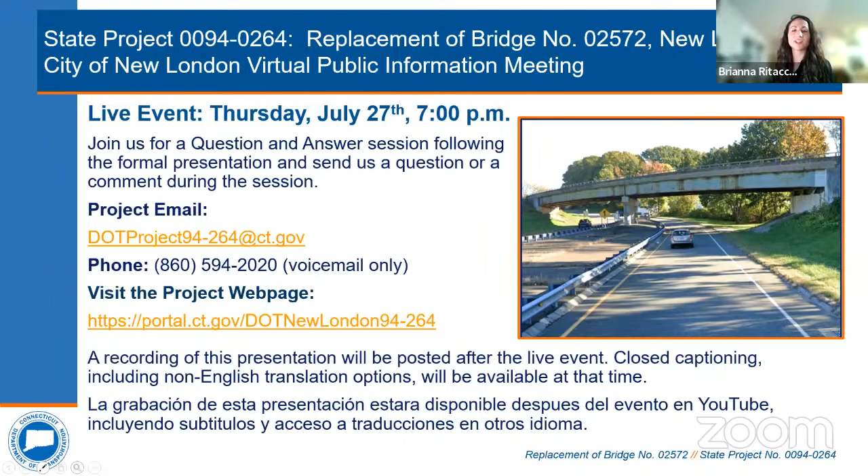Good evening, everyone, and welcome to the virtual public information meeting for state project number 94-264, which is the replacement of Bridge 2572 carrying Route 1 over South Frontage Road and the I-95 off-ramp in New London, Connecticut. My name is Brianna Ritacco, I'm the project engineer with the Connecticut Department of Transportation for this project. We hope everyone finds the presentation informative and that we'll be able to address any questions or concerns you may have. I also wanted to thank Brian Sear, the City of New London Public Works Director, for meeting with us back in May to discuss the project and for helping to make tonight's meeting happen.

So first, I'll hand it to Louis to explain how to turn on captions and subtitles.

Available to those joining us tonight through Zoom is the option to view captions or subtitles. To turn on this feature, select the Show Captions button or the CC button at the bottom of your screen. Then select the Speaking Language button and then select the desired language.

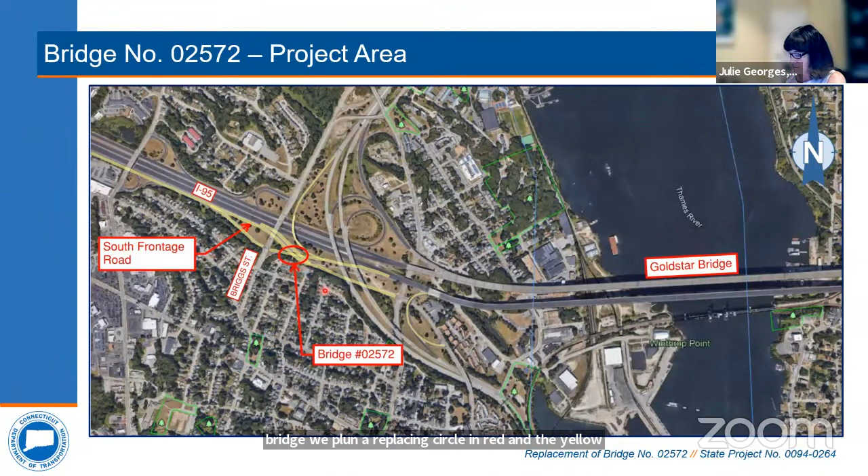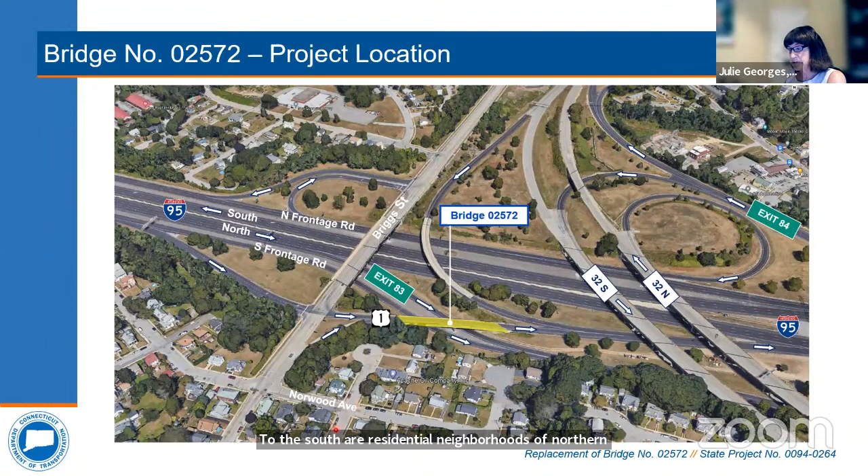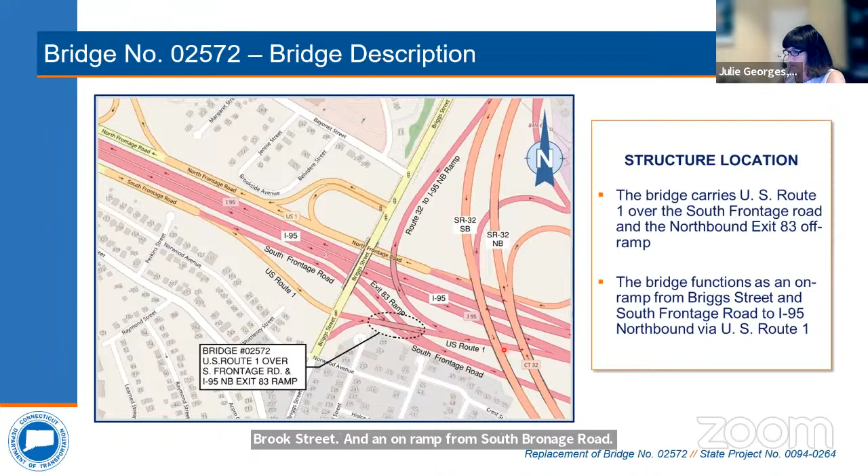The beams also carry loads like wind and, on occasion, earthquake loads, which is rare. The superstructure is carried by the substructure to the ground. The substructure components are wing walls, abutments, and piers.

All state bridges and local bridges over 20 feet in length are inspected every 2 years by the Connecticut Department of Transportation's Bridge Safety and Evaluation Unit. The major bridge elements are assigned a condition rating on a scale of 1 to 9, with 9 being excellent and 1 being imminent failure. Typically, when a major bridge component such as the deck, the superstructure, or the substructure reaches a condition rating of 4, a project is initiated to address the deficiencies.

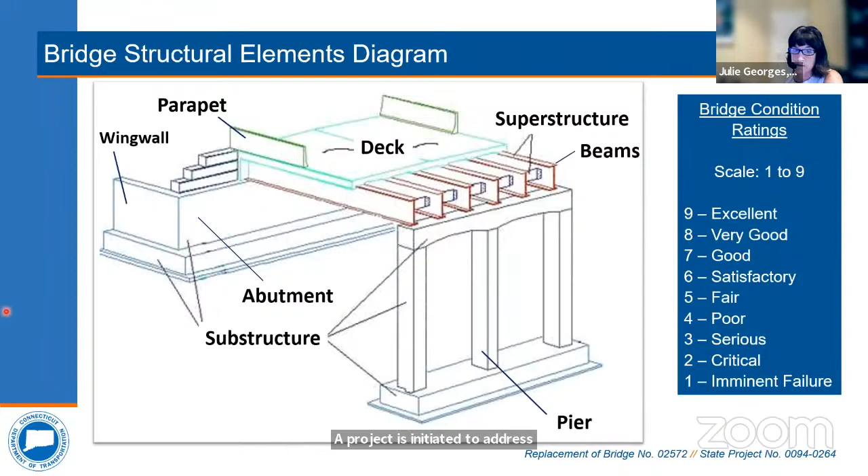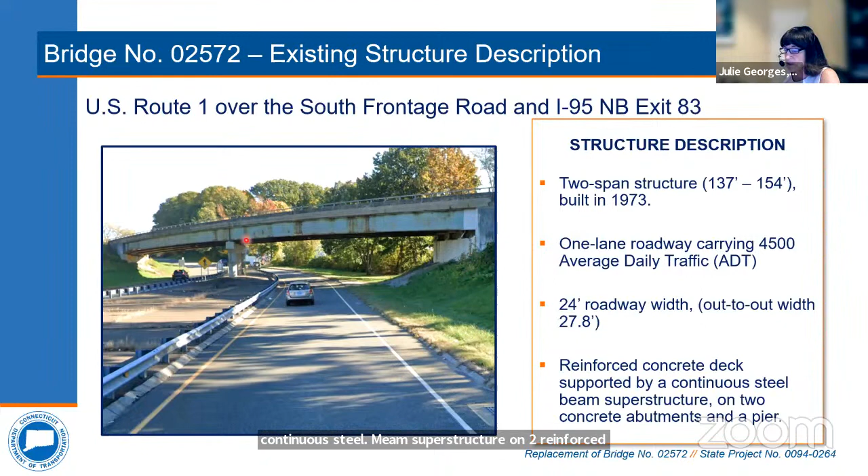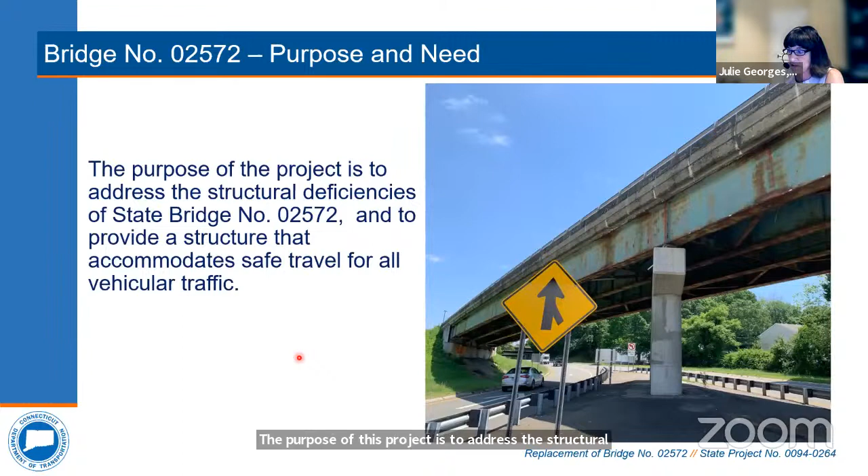The bridge is a reinforced concrete deck supported by a continuous steel beam superstructure on 2 reinforced concrete abutments and a reinforced concrete pier. The purpose of this project is to address the structural deficiencies of State Bridge 2572 and to provide a structure that accommodates safe travel for all vehicular traffic.

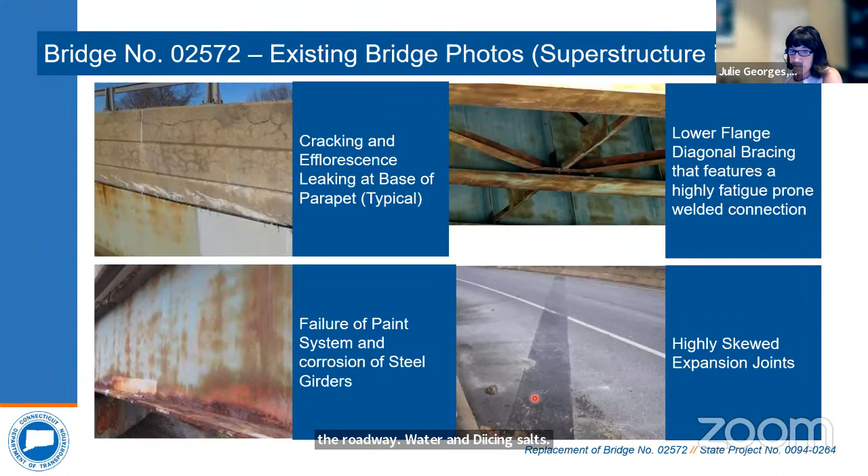The bottom right, we can see the highly skewed expansion joints. This expansion joint pictured here is called an asphaltic plug joint. Joints are meant to protect the beams beneath them from the roadway, water, and de-icing salts. The high skew makes it hard to keep many joint systems effective in terms of preventing leaks.

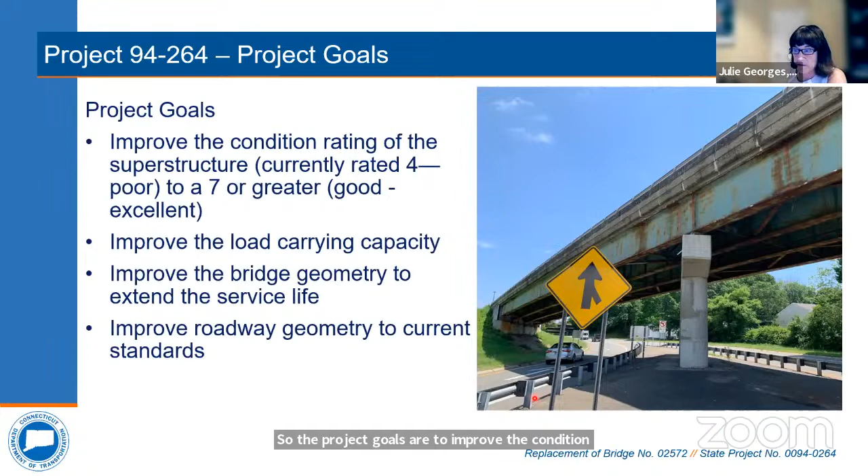So the project goals are to improve the condition rating of the superstructure to a 7 or greater, to improve the load carrying capacity, to improve the bridge geometry to extend the service life, and to improve roadway geometry to current standards.

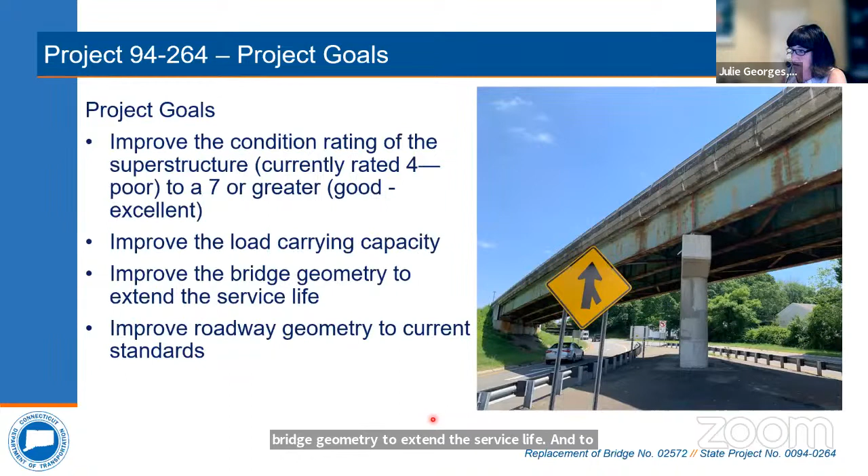This is the proposed roadway plan. This legend helps to explain this drawing. Yellow indicates proposed pavement, orange indicates proposed structure, the green fill, and the brown proposed cut.

The roadway reconstruction depicted is required because of the bridge replacement, which I will go into describe in more detail in a few moments. US Route 1 and the northbound entrance ramp will be shifted to the north and reconstructed for about 1,075 feet. The profile of this road will also be increased to provide proper vertical clearance for the bridge.

South Frontage Road will also be shifted to the north and reconstructed for approximately 1,300 feet. Briggs Street will be widened slightly and repaved for 390 feet. The slip ramp that now allows you to go from Briggs Street directly onto the entrance ramp will be eliminated and removed.

Other roadways requiring some repaving will be the exit ramp as it merges into South Frontage Road and the I-95 on-ramp from Route 32 onto Route 1.

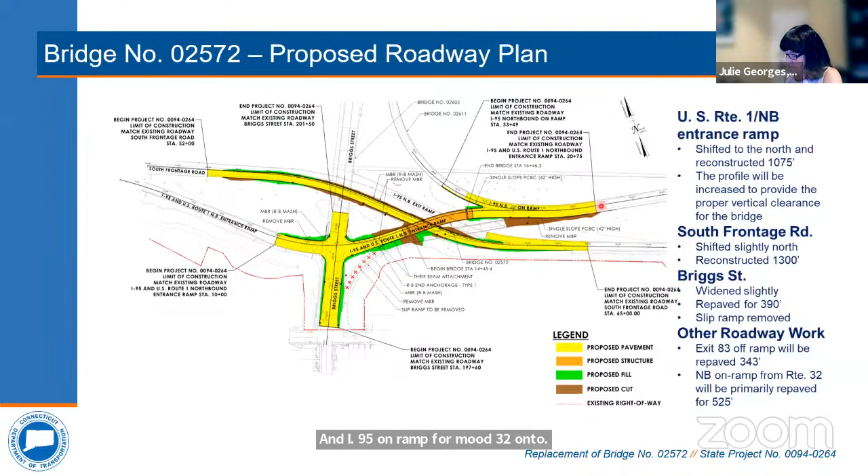These drawings are typical sections, and they show cross sections of the proposed roadway and use arrows to depict the lane use and show the width of the roadways. This is the view you would have if you're driving on the road. The legend shows the dark gray represents proposed pavement reconstruction, the brown indicates proposed guide railing, and the green indicates topsoil and seed.

The top typical section here is Route 1 northbound entrance ramp. It's a one-lane, one-direction road with a 12-foot travel lane, an 8-foot left shoulder, and a 12-foot right shoulder. South Frontage Road is also a one-lane, one-direction road with a 12-foot travel lane, a 4-foot left shoulder, and a 10-foot right shoulder.

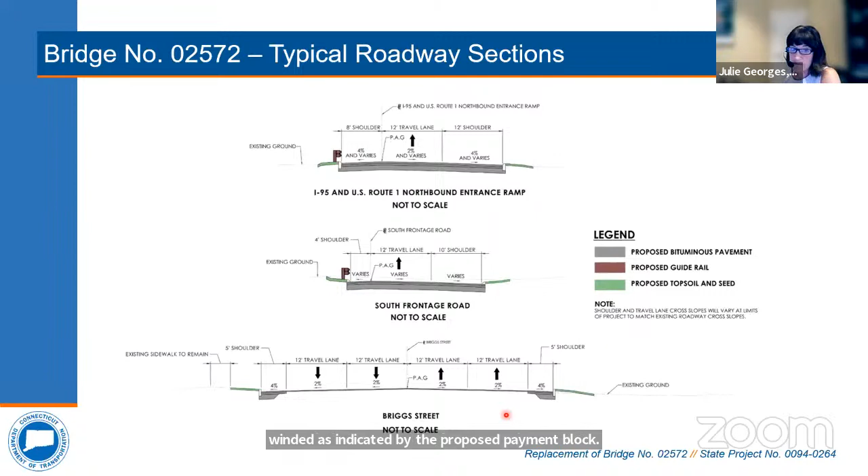Briggs Street is a 4-lane road that carries 2 lanes in each direction, and you can see that it'll be widened. The shoulder will be widened as indicated by the proposed pavement block. The widening will allow bicycle traffic to use the road more safely.

This is the plan for the new bridge. In terms of the general plan, the legend indicates that the light gray is the existing structure, the orange is the proposed structure, and the yellow is the proposed pavement.

The new bridge will be constructed to the north. This will simplify construction in that it will allow existing traffic to use the existing bridge while it is constructed. The new bridge is a single span, while the existing bridge is a 2-span bridge.

The elimination of the pier will reduce maintenance costs in the future. It's also a shorter span, the new bridge, which will also reduce maintenance costs in the future. The new bridge has abutments which are perpendicular to the direction of traffic and eliminates these heavily skewed joints and allows the bridge to be more serviceable and maintenance friendly.

The thin orange lines depict the wing walls and retaining walls required for the bridge. Retaining walls and wing walls will be required in all 4 corners.

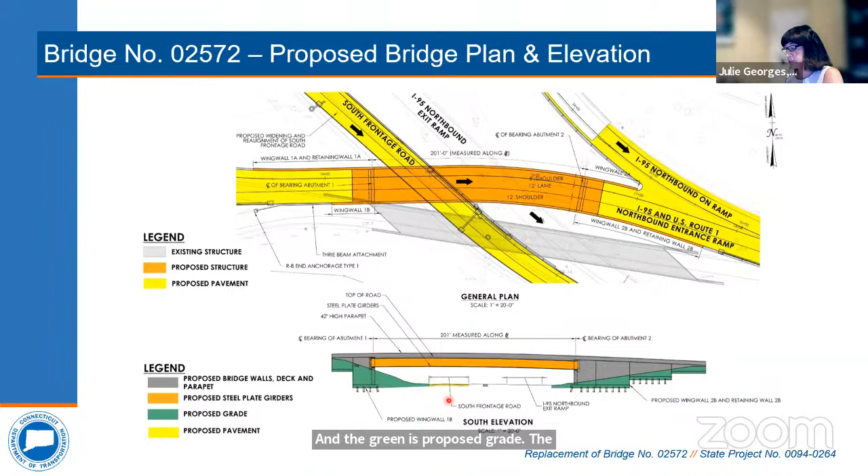This is a southern elevation of the bridge from the south looking at the bridge. The dark gray is proposed bridge walls, deck, and parapet. The orange is proposed steel plate girders, and the green is proposed grade. The yellow is proposed pavement, which is indicated here for South Frontage Road.

This slide helps to explain how this bridge will be built. The top left shows the bridge as it exists today from the view as if one is driving on the bridge. The top right shows stage 1 construction, which will provide a new precast concrete barrier curb, and the road will be shifted slightly to the right. A 12-foot lane will be provided, and a portion of the existing bridge will be demolished.

During stage 2, the new bridge can be built in its entirety while the existing bridge maintains the existing traffic. In the final cross section, the new bridge will carry all the traffic, but the remainder of the existing bridge will need to be demolished.

You can see from this drawing that the new bridge is wider than the existing bridge to meet current standards. The new bridge is also deeper than the existing bridge to allow for a longer span, a shorter span without a pier.

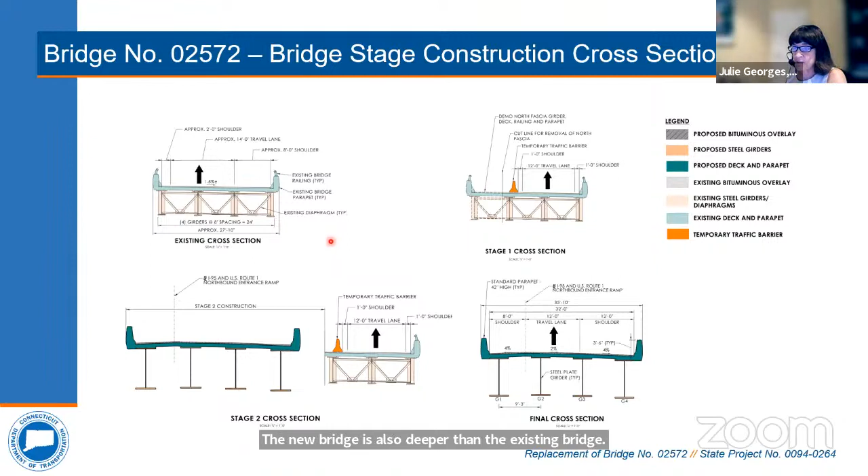Because the new bridge is over South Frontage Road, there will be periods during construction when South Frontage Road needs to be closed. For example, during erection of the new bridge and demolition of the existing bridge, for the safety of vehicles traveling beneath, the road will need to be closed. This drawing depicts how traffic will be detoured to allow for the closure of South Frontage Road.

The limits of the closure are depicted in gray crosshatching. Traffic wishing to continue along South Frontage Road will be required to take the exit to Briggs Street, drive along Briggs Street, take a right at William Street to connect to a point along South Frontage Road. This detour will also be required when South Frontage Road is reconstructed after the new bridge is in place.

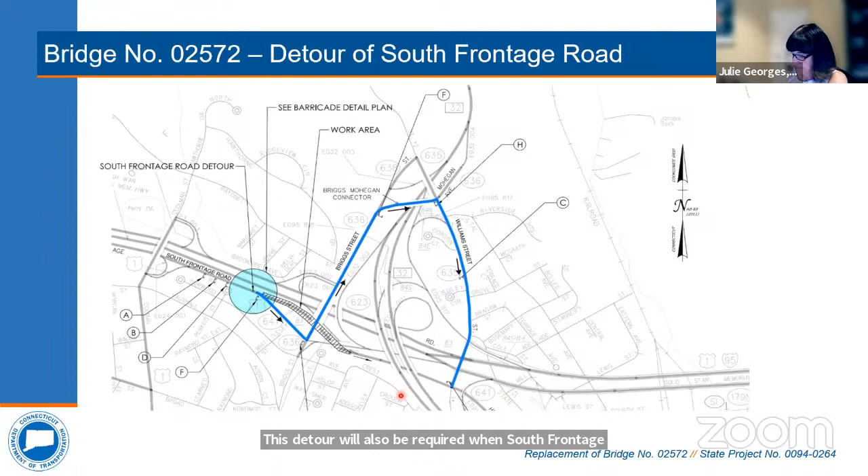Similarly, the exit 83 off-ramp will also need to be closed for periods of time during construction, particularly during erection of the new bridge and demolition of the existing bridge. Northbound traffic wishing to connect to the exit 83 off-ramp will be rerouted from exit 82A along South Frontage Road to their ultimate destination.

Both detours will only need to be implemented during specific construction activities. For most of the duration of construction, South Frontage Road and the exit 83 off-ramp will remain in place and open. Both detours are fairly short, intuitive, and will not worsen existing traffic capacity substantially.

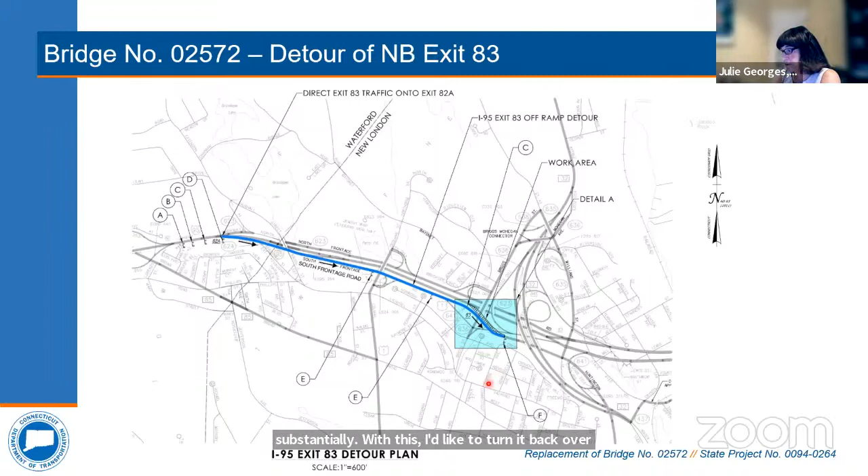Thanks, Julie. Some additional items we would like to note are related to rights of way and environmental impacts. There are no temporary or permanent property impacts anticipated at this time, and there are also no wetland or watercourse impacts anticipated either. Under NEPA, the National Environmental Policy Act, the project appears to qualify as a categorical exclusion due to the project's minimal environmental impacts. Please note that the impacts presented are preliminary and are subject to change as design progresses.

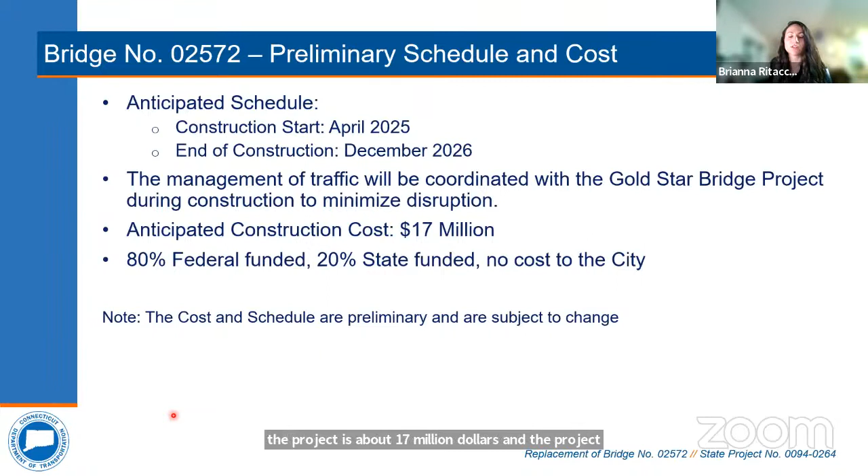Lastly, I'll present the preliminary project cost and schedule, which are also subject to change. We anticipate construction will begin in April 2025, lasting through December 2026. I also wanted to note that the project team is aware of the Gold Star Bridge project going on in the area, and the management of traffic will be coordinated with that project during construction to minimize disruption. The anticipated construction cost for the project is about $17 million, funded with 80% federal funds and 20% state funds.